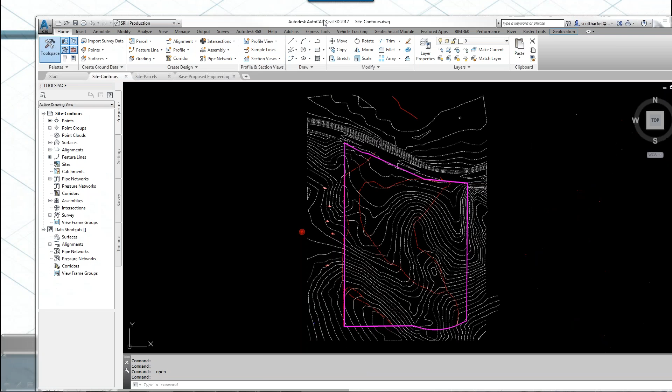Okay. I've already gone ahead and created a surface, and I've put in a polyline for the boundary of my project. For time's sake, hopefully we all know how to go ahead and create a surface and things of that nature. I've also gone ahead and laid out some parcels, right-of-ways, etc. And I also have my base proposed engineering drawing, what I actually want this project to look like.

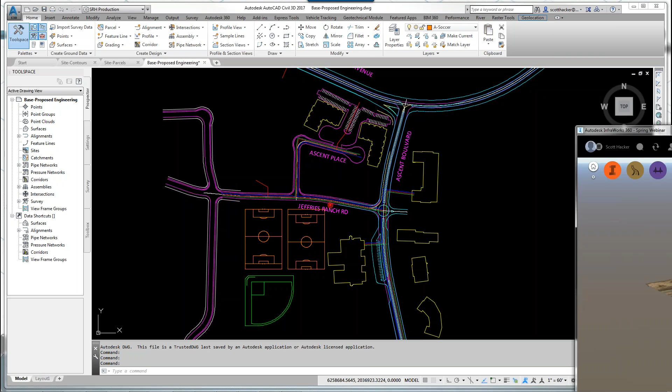There are a couple of different buildings. We've got roadways, and we also have some ball fields that we're going to try to bring in and hopefully show in InfraWorks, as well as bringing it back into Civil 3D. So with that, I'm also going to go ahead and bring InfraWorks over. Hopefully everybody has opened it up and is familiar with InfraWorks. And this is my project area.

Okay, this is in Oceanside, California. So it's kind of densely and sparsely vegetated here. We've got a main road running across the top of the project. We've got a development here. And what we're going to do is, like I showed you, we want to have a couple of office buildings and some athletic fields running through here. So we're going to have a couple of local roads, a collector road running through. And this is my master.

So if I come back and I go out to InfraWorks and I use the Model Builder, this is actually a pretty nice piece of software. It allows us to go ahead. We can search anywhere, not only in the United States, but the world. So if you are creating any type of projects anywhere else, say Mexico City, as you can see on the screen, Venezuela, etc., it doesn't matter. It now encompasses the entire world so that you can access it.

So in order to find your location, I'm simply going to type in Jeffries Ranch Road, and it automatically finds it for me. So there it is, Jeffries Ranch Road, Oceanside, California, US. So I'm going to click on that, and it's going to take me directly to the project location. Now this is accurate. I've already gone ahead and taken a look.

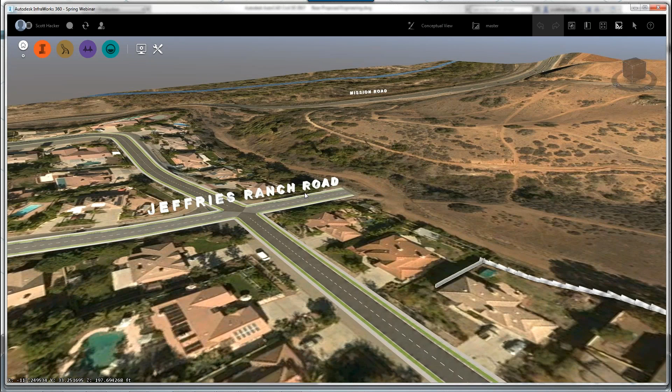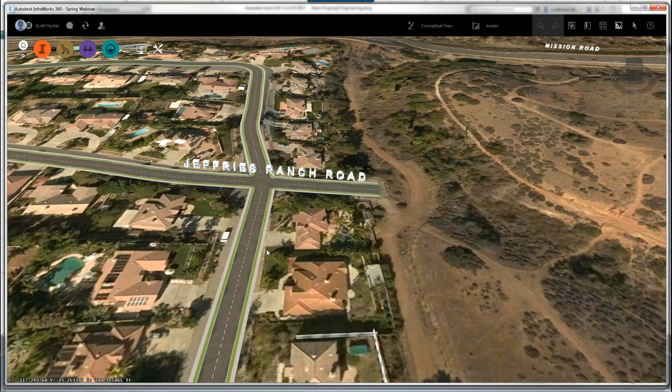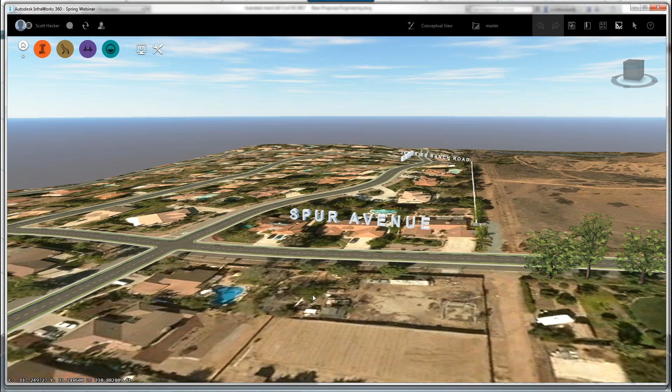Now I've added the roadway names here. So these are just 3D objects that I've brought in from SketchUp and created so that I can give my customer an idea of where exactly we're at in the project. So I've gone ahead and labeled most of the existing adjacent to our project. Okay, there's Spur Avenue, and we've got Mission Road all the way there at the top. Okay, so this is what you're going to get.

Now I told you you're also going to get some terrain, and if I turn this up on itself, we're going to go ahead and see that. Now this is a pretty large parcel here, and it's actually pretty ugly to try to develop, quite honestly. We've got a low spot here and another low spot here. Looks like drainage areas. So we're going to have to take a look at what's going on here. Okay. Now with that, you're going to get terrain.

But most generally, we're going to have a survey crew go out and shoot our topo. So we're going to have a more defined and hopefully a more accurate surface once we get into InfraWorks to bring in. So the first thing I want to do is I want to go ahead and bring in my existing surface, okay, and kind of update my terrain here if at all.

So what we're going to do is we're going to go to our data sources, and let me just come back here for just a second. You saw that I had my Civil 3D surface already squared up and taken care of. So in this case, I'm going to use the entire Civil 3D drawing file because I'm creating my project as data references, so I'm going to have a very small surface drawing, a very small parcel drawing, a very small alignment drawing, and then we're going to bring them together at the end for presentation.

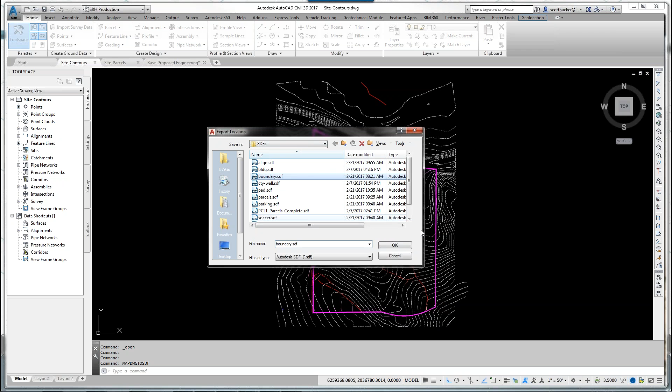Okay. Now with that, I am going to go back to Civil. And I want to bring in my boundary so I can get a better idea of how the extents of this project are going to look. So I'm going to create an SDF file. I'm going to use the MAPDWGTOSDF command. Now I've already created one for boundary, and I'm just going to end up canceling this.

But it opens up the export dialog box, and you're going to want to either select manually or you can select by layers. In this case, I would select manually and just zoom in and select my polyline. Enter takes us back. And in this case, you want to treat closed polylines as polygons because that's important. If it's open, it's just going to be line work. If it's closed, we can actually create areas. So with that, I've created it. We'll just cancel back out.

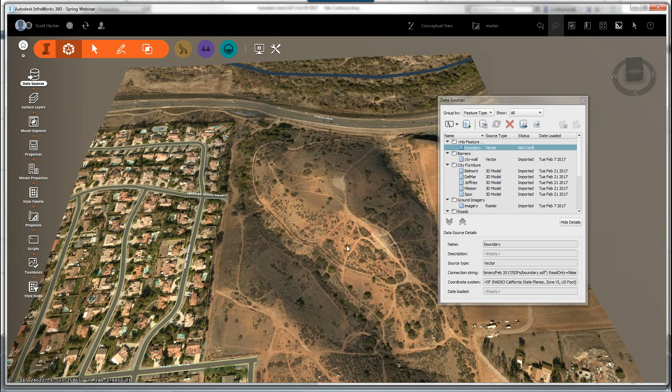Okay, and I'm going to go back to InfraWorks. And we're going to bring that in as a coverage area. So I simply select my feature type. We're going to go to our SDF files. And I'm going to bring in the boundary, and I'm going to open. Now I can drag and drop as well. For the purpose of the presentation, though, I'm just going to select it via Windows.

And it comes in. There it is, vector, but we've got to configure it. So we're going to select configure. And we've got to give it a type. In this case, I want it to be a coverage area, because with a coverage area, I can now give it a style.

Now, I do want to step back for one second. Please make sure that you have set your coordinate system in your Civil 3D drawing. In this case, it's California NAD 83, and it is survey feet, because we want these to go back and forth seamlessly, and they will if you set your project up correctly.

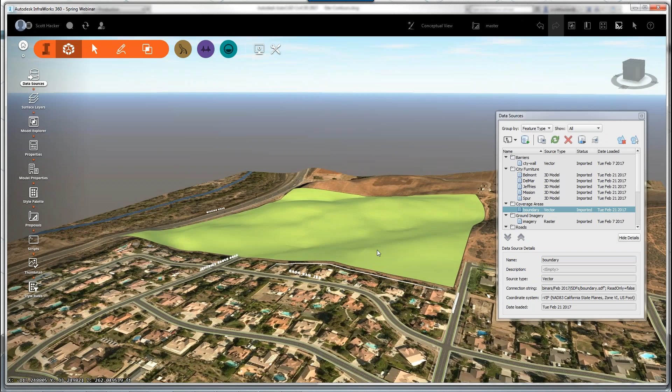So right now, it's going to bring in my boundary in the exact location that I have in my Civil drawing. So I need to come back to my common, and I'm going to give it a style because I want to see it. So I'm going to select grass with gravel border. We're going to select that, and simply say OK. We'll close and refresh. There's my project boundary. Now I've brought it in as grass, so you can see it drapes itself over my existing terrain. And we can get a better idea, hopefully, of what our project looks like.

Okay, now with that, let's say I'd like to see my contour lines. This is great, but I'd like to see my contour lines. Well, in order to do that, I need to create either a parcel or an easement within InfraWorks. So I'm going to go to my Design, Review, and Engineer location, and I want to create an easement. So I select my Draw and Design, and I want to create an easement.

Now, I can set up a style here, which is no problem. I can even set it so that it's transparent. So if I want to show my contours, I simply select with my cursor the area that I'd like to see. Double click at the end. Whoops.

Double click at the end, please. There we go. Okay, now let me move my data sources over to my other screen here real quickly. All right. What you need to do is you're going to see your asset card.

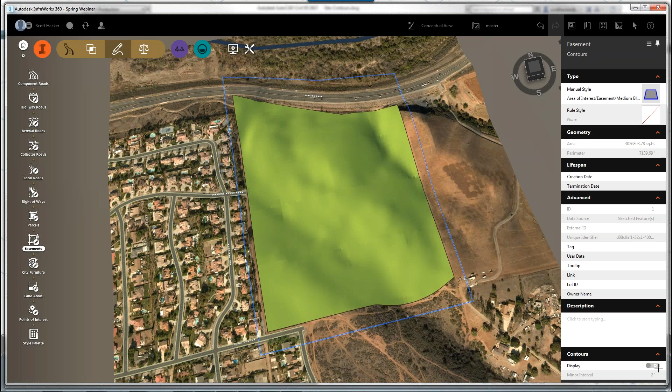Okay, so this is an easement. If you want to enter a name, you can. If you just want to simply call it something like contours, great. Okay, but down here at the very bottom, I want to show my contour, so I actually have a panel here so that I can do so. So if I simply move over and click toggle on, there's my contours.

Okay, now labeling them is a little bit more difficult. You can't label them in InfraWorks like you can in Civil. However, you can create an SDF file for your labels and you could bring them in accordingly. Now in this case, we're pretty tight and we've got some serious grade issues as we saw before.

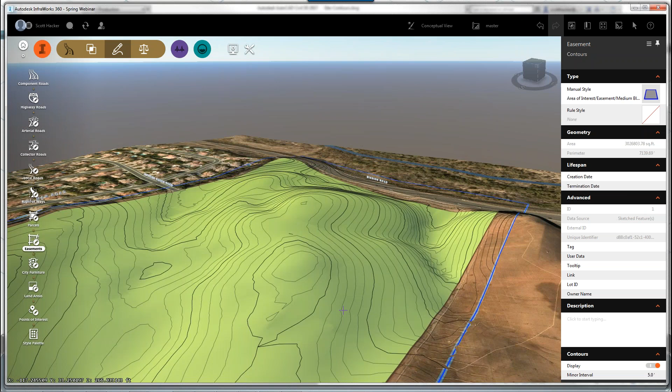But if I want to change the interval, say from 2 foot to 5 foot, I simply click and hit enter, and now I see my contours so I can get a better idea here, okay, of what's actually going on. All right, so with that, I've got my coverage area, I've brought in my existing surface, and I've actually given it some contours.

Now, what I like to do is I like to create different proposals within InfraWorks. So I basically just went ahead and created a new proposal. So if I say add here, it's going to prompt me for a name. And in this case, I called it surface. And it makes an exact copy of my master proposal. So if I come into surface, it's going to take just a second to regen.

Okay. And in this case, I've gone ahead, I've added my north arrow just in case. And then I would create my surface here. Okay, I did it on the master because that was the first one, but I should have done it on my surface. So with that, I'm going to go back to my master. Okay, and what I'd like to do now is very quickly go ahead and add my parcel lines.

Now, I've got parcels created in Civil. So I've already had my designers or my surveyors or whomever I choose to create my parcel layout. I've created Civil 3D parcels. So that's my pond. I've got some single family, some multifamily here. I've also got commercial right of way. I've got a school, and I've also got a municipal reserve. Okay, so it's going to be open space there.

So in this case, what I want to do, I do want to create an SDF file or a spatial data file, but I don't want to map DWG to SDF. I want to actually utilize the output tab, and export civil objects to SDF. Okay, now I'm going to go ahead and select the location, and I actually have parcels here, and I'm going to set save. Yes, I sure would like to replace it.

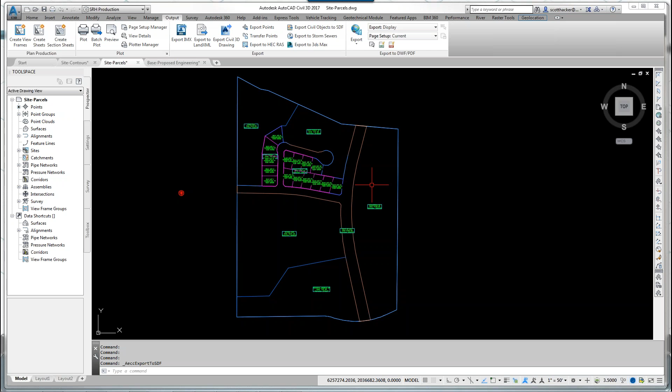Okay, so it's going to write it out as an SDF. It's going to show me my drawing coordinate system. Okay, and I'm going to click OK. Well, that's just grand. You're supposed to overwrite it, but let's do this. So we'll do parcels, and we'll say 01, okay, and okay, because I want to show you this.

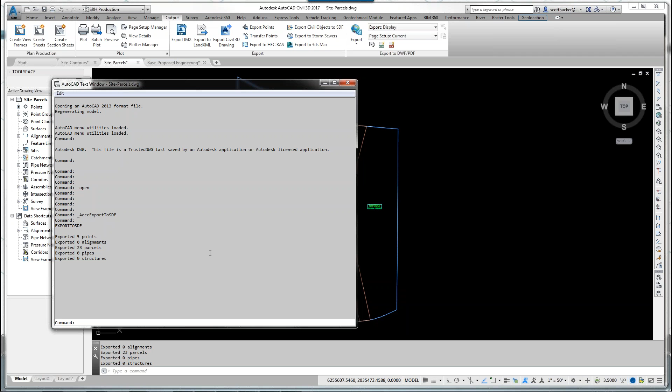I want you to come down here and look in my command line, exported 23 parcels. So it's going to show me exactly what it's exporting. There are no alignments in this drawing. There are 23 parcels, no pipes, no structures. Okay, so that's what has been exported. There are 5 points in there. Now those are just street lamps. They're not going to make any bit of difference at this juncture. Okay, so I now have an SDF file for my parcels.

So we're going to come back, and I'm going to go ahead and bring them in. So let's bring back our data sources here. Okay, so I did create an SDF, and I'm going to use my parcels from before, and we're simply going to say open. I don't want the points, I just want the parcels. We're going to say okay, and

under configuration, these are going to be coverage areas. Okay, so we've already created one for our overall boundary, but I want to create a coverage area based upon my parcels. Now the same situation applies here. It's going to find the coordinate system and translate it properly. I do want these to drape for the time being.

Okay, so I'm going to go out and I'm going to select a style. Okay, and I'm going to go ahead and select grass again. We'll say okay, and we'll close and we'll refresh.

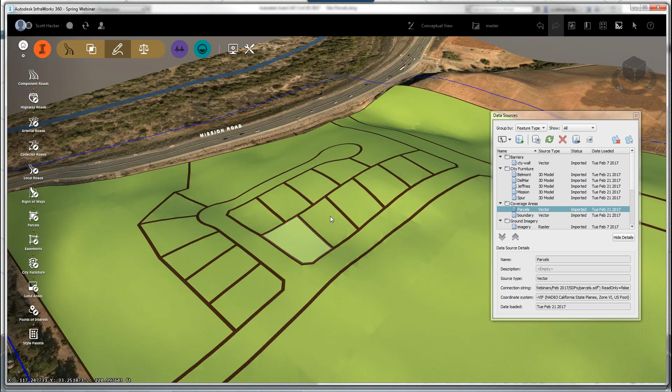So now we have our parcels, and we can get an idea of what's going on here as far as our grading. What do we have to look at? Okay, it's all about design and context. All right, so as you see, we're going to have a knuckle and a cul-de-sac. We're going to have a through road here, local road. We're going to have a collector, and eventually we'll tie into Spur Avenue somewhere here down on the south portion.

Okay, so with that, now what I can do is I can actually go ahead and use my style palette to create a zoning map. Okay, well that's great. So we're going to come back and we're going to access our build and manage, and under style palettes I'm going to go ahead and look for coverage areas, and I've created one called zoning. So what I've done is I've basically added with my style, I've created a new coverage area, and I've created them based upon a zoning map that I found online. So just bear with me, it may or may not be something that you're familiar with.

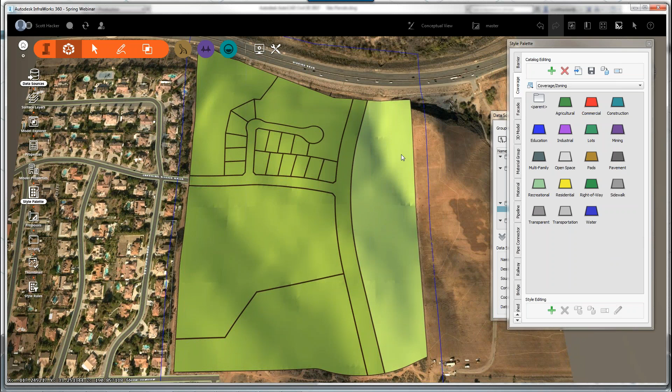Okay, but I've got my commercial here. So if I want to change this area here, I can simply grab and drag, and it's going to go ahead and update it so it shows up as my commercial area. Okay, we said that this was open space. Same situation. I've got right-of-ways. Simply drag it over. It's going to show it to us. Right? Multifamily. I've got educational or school is here.

I've got water that's going to go up here. My pond is up here. It's the low spot of the site. Okay. And then I've got residential, so I can pop these in. Okay. So we can go ahead and take care of that. And you guys and gals get the general idea here. Okay. Now again, if you need to, you can simply select show your contours, so you can create a pretty nice little zoning map that you can show people.

They can understand. The client sees exactly what's going on in the areas that you're going to utilize for your zoning. You can take this, print it off, bring it up on your computer screen, show residents exactly what's going to happen, let them know, throw on a legend, and they're going to be able to see exactly what's going on. So visually, this is exactly what we want. We want to be able to show our customer or our municipality what we're doing in real time and what it's going to look like.

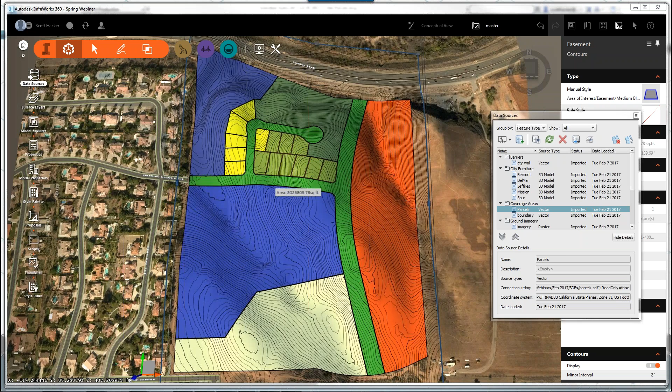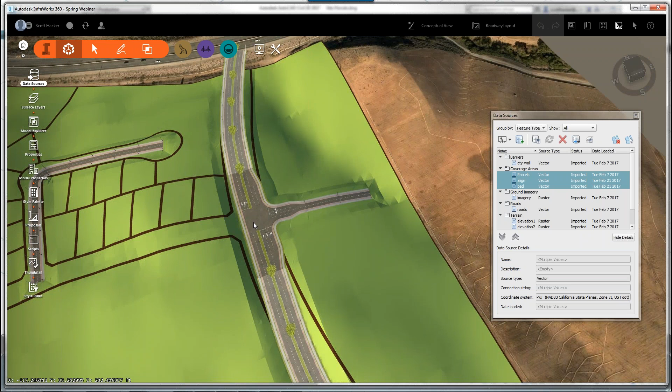Okay, now I've already gone ahead and I've actually created a roadway layout here. So this is what we're going to be able to accomplish within InfraWorks. Now what I've done is I've already gone ahead and I've thrown in this design road, I've gone ahead and thrown in my example here. So I've got a local road here to the left, and then I've placed a collector road in here. Now these are design roads using the design and manage tools that come with InfraWorks.

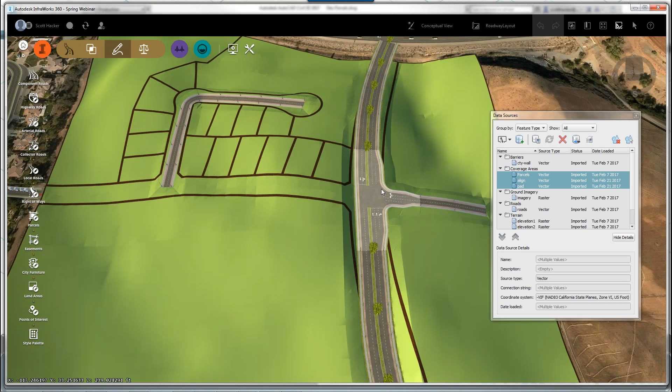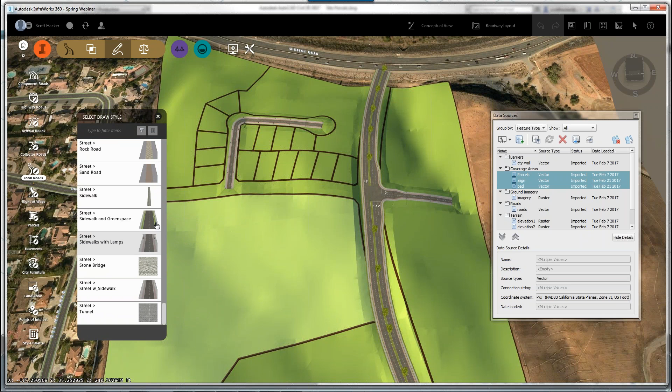So what I'd like to do now is I'd like to go ahead and bring in a connection for Jeffries Ranch Road. Okay, so with that, we're going to say that this is probably a local road, so we're going to select local, and we can select whatever style we would like. So I'm going to select, we'll just go sidewalk and green space for the time being. Okay, so all I need to do is go ahead and click where I want to start, and I'm just going to go ahead inside my right-of-way, and we're going to drop it somewhere there, and hopefully it'll connect up.

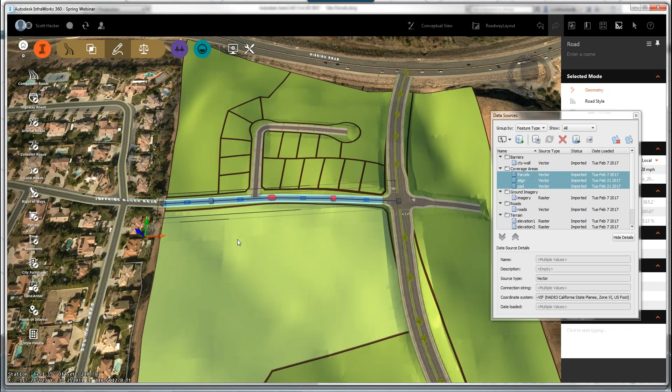Okay. Now what it does is it places our vertical curves based upon a 28 mile per hour design speed. All right. So you can see that Jeffries Ranch Road, and we can enter a name here. Okay. Has a design speed of 28. So if we'd like to change that to an actual 30, we can do that. It will automatically adjust our vertical curves, etc.

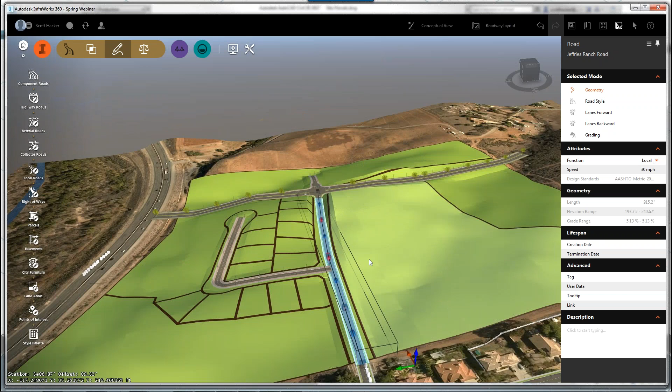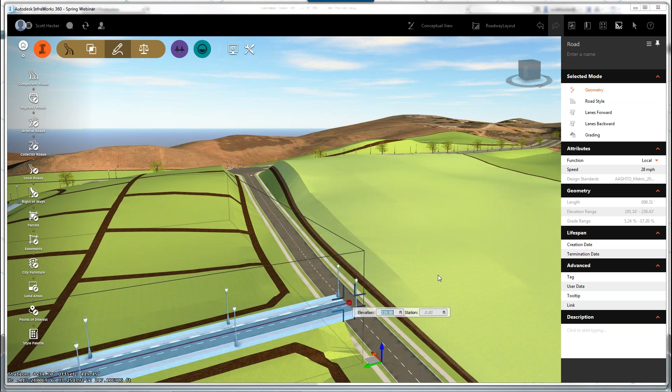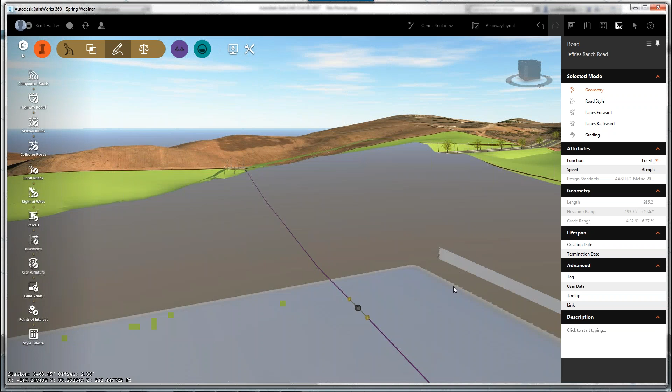Okay. Now we've got somewhat of an issue here because we don't have an intersection. So we've got a tight spot. So we need to either bring our collector road up or down depending on what's going on here. We'll move it up just a hair and we'll see if we can connect and come back and actually get our tie-in. And I may need to just go ahead and add a PVI and move that up until I get my intersection.

It's a lot easier than I'm making it here, folks, so bear with me. So I'm a little bit high. And I'm not quite there.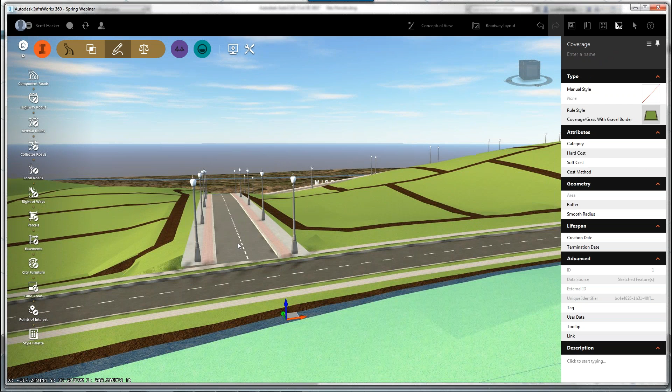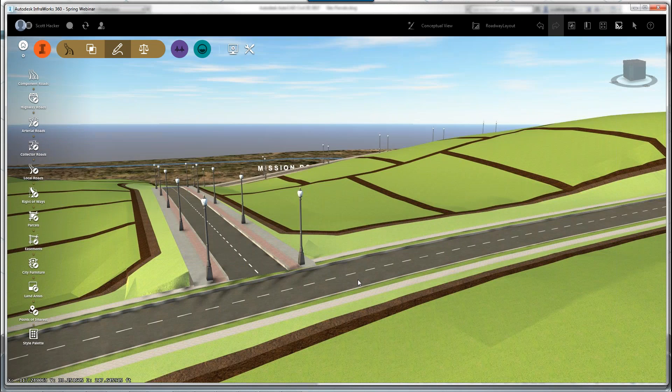Okay, and of course it's not doing what I would like it to do. Never fails. It's supposed to be able to move it this direction, but it's not going to allow me, and that's okay. We can come back and fix that later. The important thing here is that we actually got it to tie to this intersection.

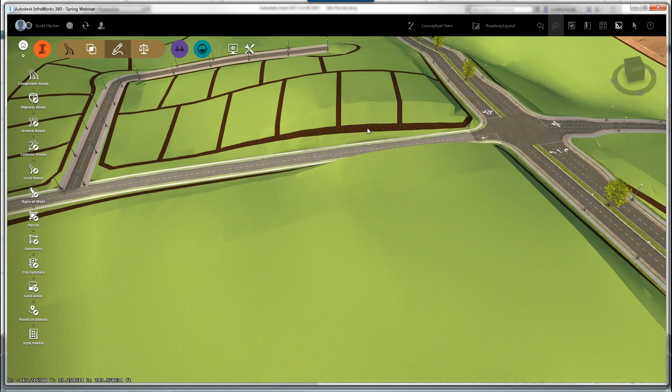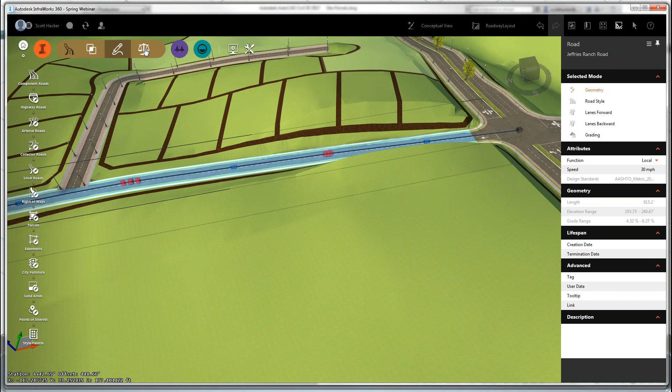Now what I'd like to do is take a look at my design road, because we had some serious relief here and it looks like I'm going to have some cut and fills. So what I want to do at least initially is follow existing ground. I'm going to select my design road, hit review and modify, and see what this road looks like in profile view.

Okay, so it automatically brings up my profile view. It shows where I'm tying in, so it looks like what I need is to add a vertical curve here. So I'm going to add a PVI and go ahead and drop it, so I can at least match existing.

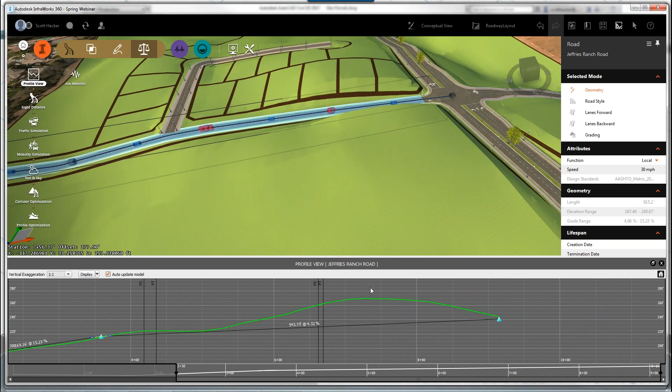And it's going to dynamically update my design road. Now in this case, I'm following along, and I don't know that I want to actually come up and over and hit my intersection here, because it looks like I've got a pretty good situation. But what I may want to do is add a vertical curve and just minimize my cut in this area. So we'll bring it up just a tad bit and minimize our cut.

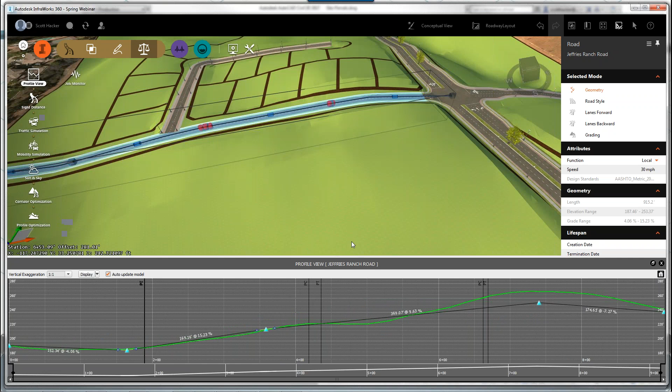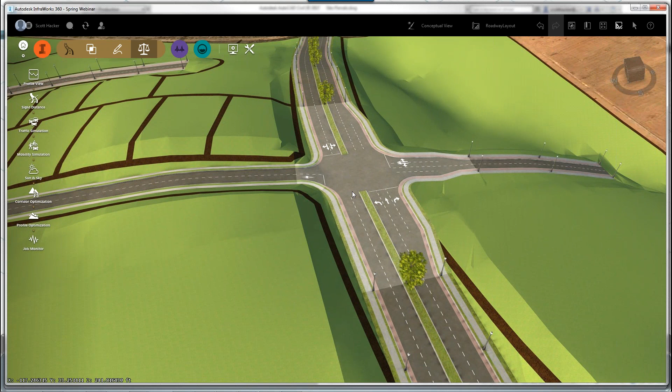Okay, so we can see that we're following along pretty well. And once we've got that taken care of, we'll close our profile view. It's tied in pretty nicely to our intersection. It's gone ahead and automatically created it, because we've actually got it right in this location. Okay, and I want to go ahead and see whether or not a roundabout might work.

So I'm going to select my intersection. In this case, I can see my design card. I've got a junction type of intersection. If I select the icon, I can change to a roundabout, so we're going to get an idea of what a roundabout's going to look like. Now I've got different types of roundabouts to choose from.

Okay, so I've got an urban, a rural, and a mini roundabout. Let's take a look at that and see what that looks like. Okay, so there's our mini. That might be a better idea than what we're looking at. But again, you can see it in real time and you can make your assumptions right here and right now.

So I'm going to go ahead and say urban double lane roundabout. Okay, and it's going to update it and show it to me. Okay, that looks about like what I'd like. So if I was going to put a roundabout in here, that's how I would do it.

I am going to come back though, and I'm going to change back to my intersection. Now it's going to make some adjustments back. Perfect. Because what I'd like to do at this point is go ahead and add some widening.

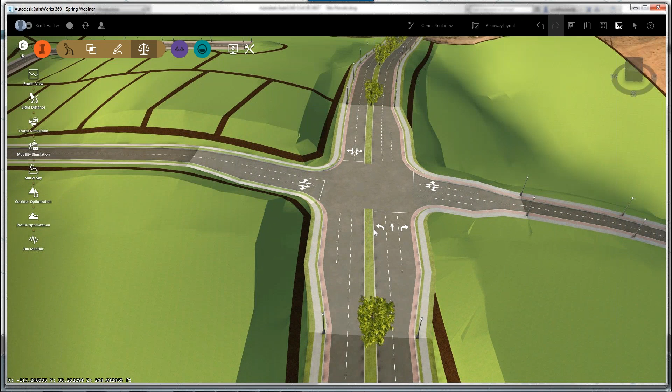So we're going to go ahead and add a couple. Okay, it's going to change up the striping. It's going to change my street the way that it looks. It's going to automatically adjust it and bring it back in. Okay, now we could go ahead and take this off, make the adjustment in profile view.

But again, we're just bringing this in conceptually, but I can go ahead if I choose to do so and make my design changes here. Okay, this is actually pretty ugly.

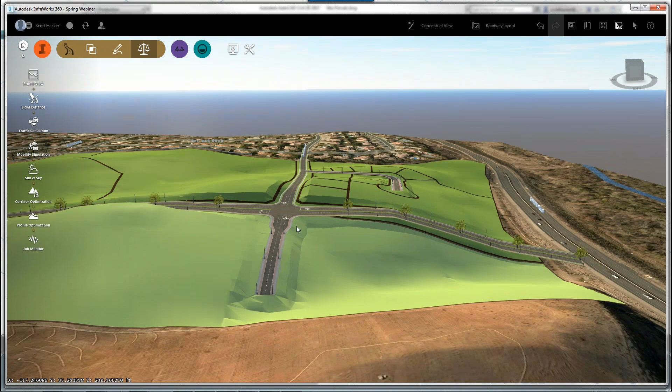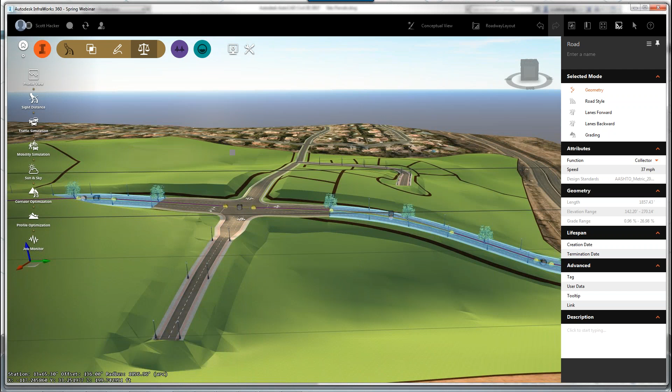So in this case, maybe I want to spread out my vertical curve, see if that makes any change. I might want to go ahead and drop it a little bit. Okay, but I want to smooth it out. Not too bad, I suppose. We could do worse.

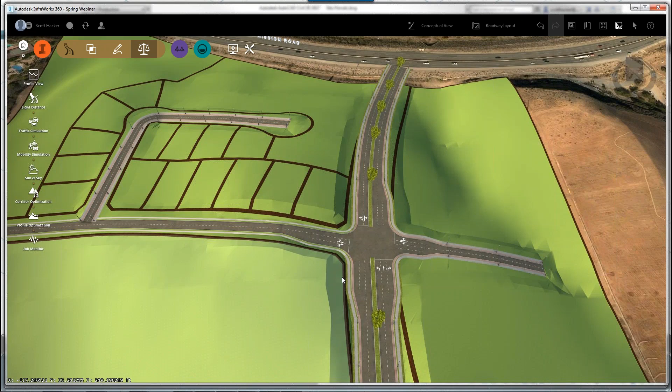Okay, so what I've got here now is I've got my design road, I've got my parcels, and what I'd like to do now is go ahead and bring in maybe some parking. So we've got our multifamily up here, and I can bring in some pads and some parking striping that I've created. Now I've done that in Civil because it's still a lot easier to create in Civil, since we're just using some simple AutoCAD. Create it with vehicle tracking if you have it, because that will make your life a lot simpler. But we've got two multifamily buildings here, we've got some parking, and we've also gone ahead and got some striping.

Okay, so with that, we're going to go ahead and use the SDF file. So we're going to go ahead and create one. We're going to map DWG to SDF. I've already created one here, and that's the one we're going to use. I've also gone ahead and created one, I believe, for striping. I have. There it is.

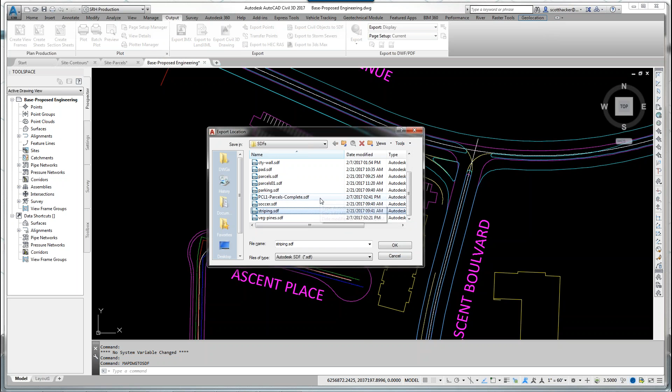Okay, so we'll jump back to InfraWorks, and we'll bring this in. Okay, and I think in this case, I'm going to go ahead and try to create a different coverage area based upon my huge slope here. I don't really want to go ahead and deal with that as far as grading it, so to speak. So what I can do is bring in a coverage area, but maybe what I'd like to do first is start to make this a little bit tidier, so to speak.

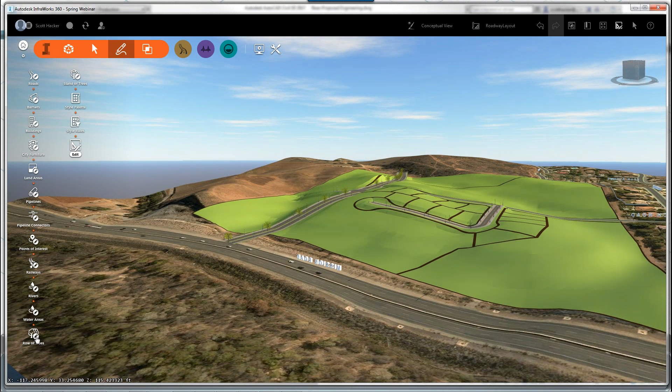And I'm going to go ahead and bring in some trees. So I'll bring in a row of trees, and I can select which ones I'd like. We're in California, so we'll go ahead and put in some nice palms. There's a South Carolina palm in here somewhere, and we won't worry about that. We'll just use this one.

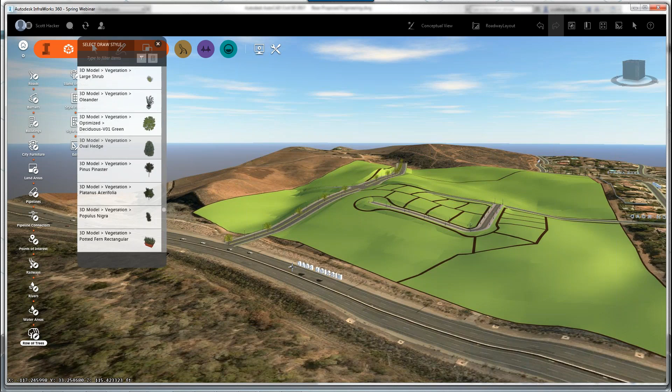Or maybe we just want some hedges. So we can go ahead and drop these in. I'm just going to draw a row, so we have some sort of a buffer. Okay, now it's going to space them kind of weirdly. So if I hit escape one time, I've got my slider bar here so I can change the density.

Okay, so you can see it's going to add more. Now, what I need to do here is because I have a row, I can simply click twice on one of the objects and increase my density some more, so I can actually go ahead and fill it in. Now I also want to change the size. I want these pretty large. Okay, so I can go ahead and start to create a buffer here.

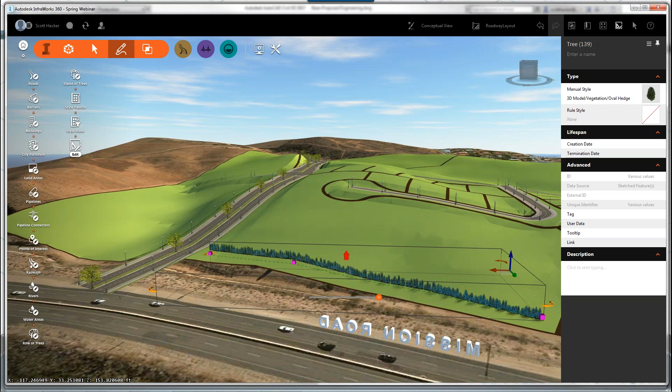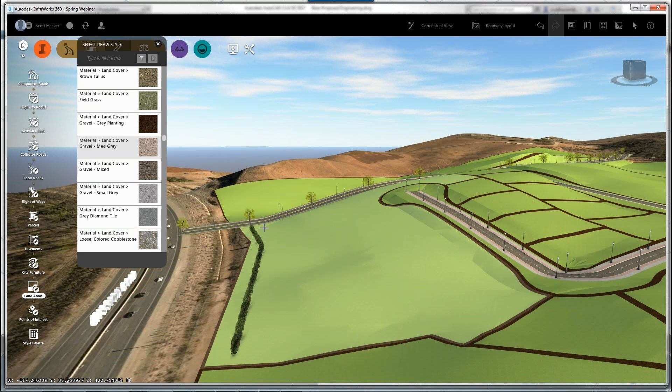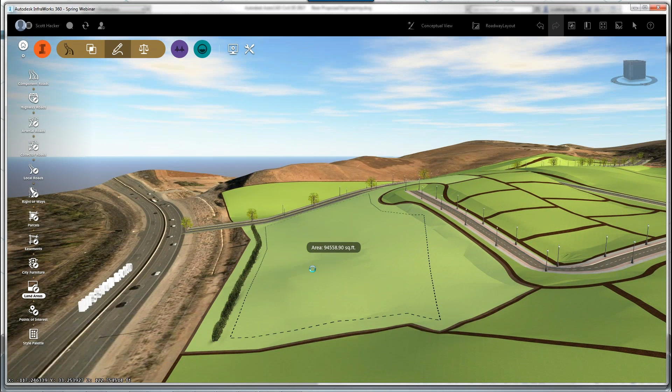Okay, great, no problem. All right, so we're going to come back. We're going to create a land area, and let's just make it gravel med grey. So we'll just start here, down, we'll just kind of eyeball this, so to speak. Okay, it's going to throw in my coverage area, at least it should have.

Let's change this, see if it's going to show up for us. There we go. Okay, so I can go ahead and raise it up. I see how it's dropped off here, but I can go ahead and make my changes. So if I want to, I can bring it up individually using my gizmos.

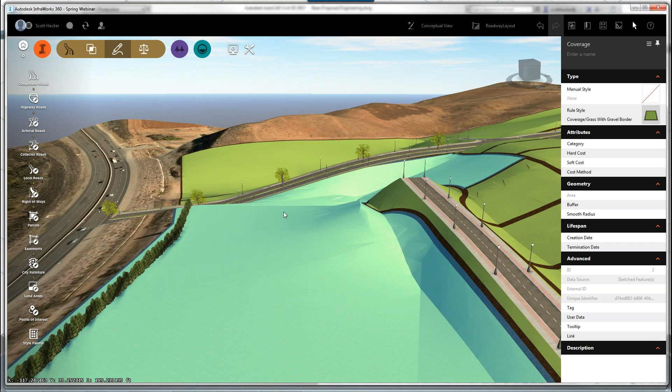Okay, and your InfraWorks is going to automatically adjust. You're going to start to see it improve the layout, so to speak. So if you want at least a general sloping away from our surface, we can do that. Okay, I'm just going to go ahead, we're going to get rid of it and take it off, if I can here. And if I can't, that's not a problem. We can always Control Z and jump back.

Okay, so if you see something you don't like and want to get rid of it, you can simply hit Control Z and it's going to take it out for you. All right, so we'll just go ahead and deal with that.

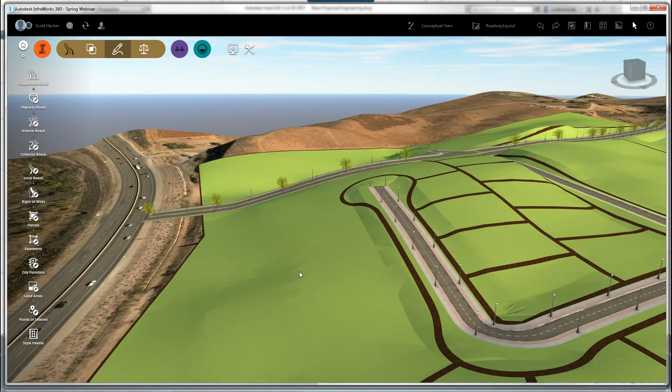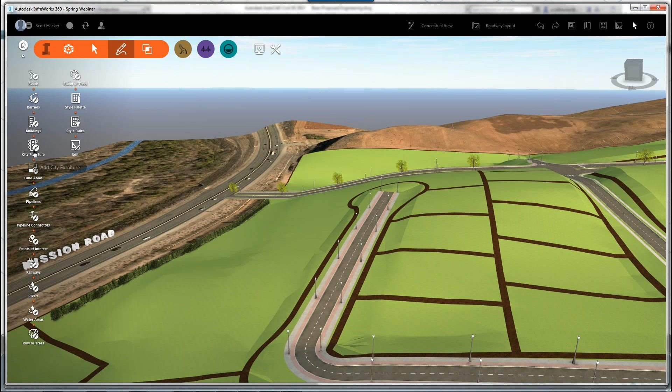So we'll go ahead and throw in maybe a couple of buildings here. Just come back to city furniture, and again we can see the different types of buildings we have and the facades we can create. I'm going to select city furniture, and I've got a post office, a couple of post offices, a church, and a couple of buildings I can utilize. Residential, we'll just throw one in. This is multifamily, we'll just say that's what's going to be here. So we'll drop that.

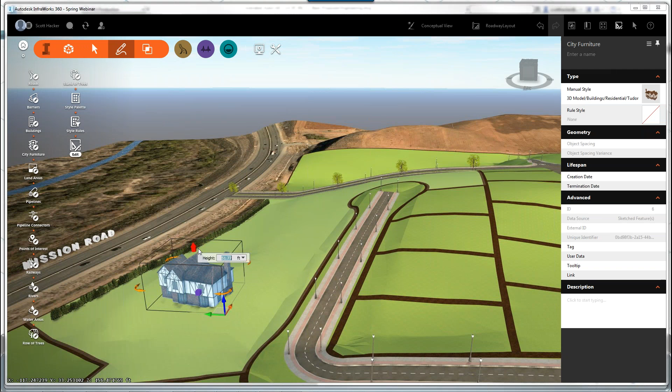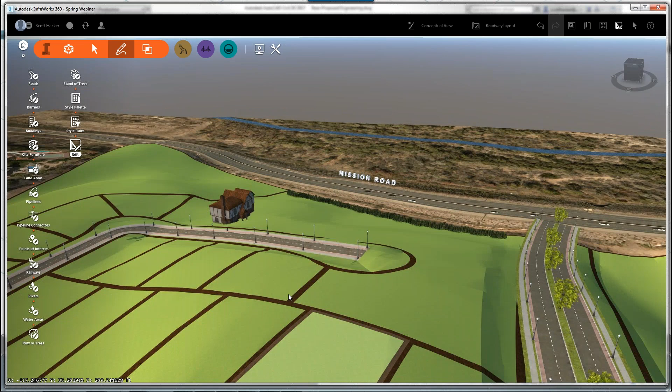Okay, and we can go ahead and place it, rotate it, etc. We can change the height. So if we have a different location, we can drop these in as well. We can start to make this look a little bit like what we want. So we can go ahead and select, and if we hit Control D, it allows us to make a copy, and we can place this wherever we would like. We'll drop that in right there.

Okay, looks good to me. Now let's go ahead and take a look at our parking. So we're going to come back to our data sources.

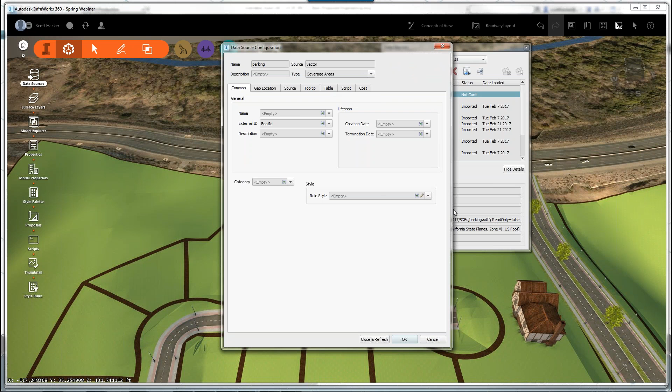I'm going to bring in the SDF file I created for parking. We're going to configure that. Okay, it is a coverage area. And I'm actually going to give it a material for a roadway, drop it down and say surface light. We're going to close and refresh.

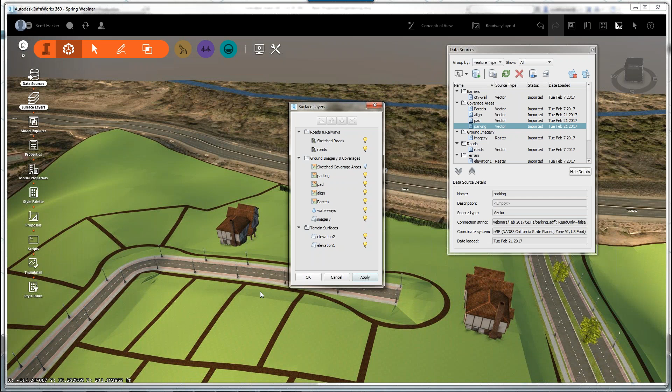Okay, and what we'll do is this: we'll come over to our surface layers because we can adjust - we do have layers in InfraWorks. My sketched coverage area, I'm actually going to freeze for the time being and say OK. And in this case, I've already brought in the buildings, but we'll get rid of these. But you can see here's my parking area, and I've got it set up so that it is concrete. Now there's that nasty slope, but we can take care of that.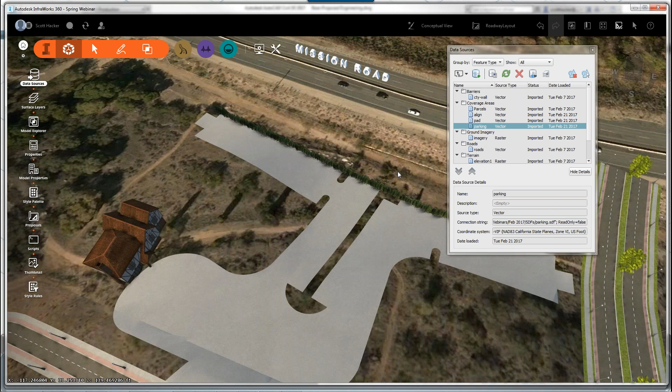And what I also want to do now is bring in my striping. With that, I'm going to access it, and I'm just going to bring it in and drag and drop. Okay, it's automatically going to go to my data source configuration file. I'm going to call this a coverage area as well. Now for my rule style, I'm just going to give it some color, so we're going to make it white. Okay, so my stripes will be white.

Now when I'm bringing in line work, InfraWorks doesn't understand lines, so I have to give it some width - I have to give it a buffer. So if I go to my table and give it a 0.167, if this is a 3-inch or 4-inch wide stripe, I just divide the width of my stripe and put that in as the buffer. So it's going to place width on each side of it of 0.167. And if I close and refresh, we'll go ahead and get rid of this. Drop that over - we can see our parking area.

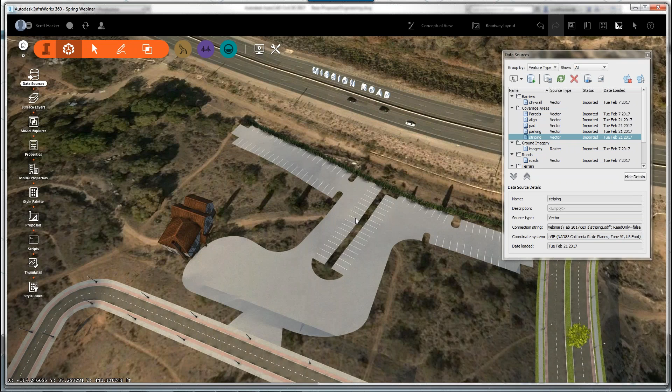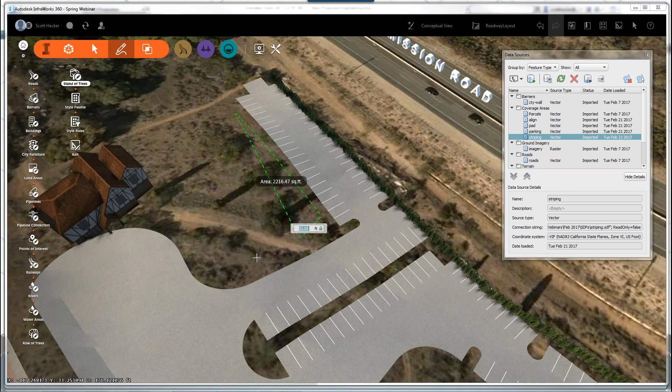Now once we get to this point, we can go ahead and add areas of trees. So if we want to do a stand of trees here, we can do that. We'll go ahead and put in some deciduous - maybe we want to bring an area of trees here. Again, we want buffer. Okay, we'll hit escape, we'll give it a little bit more density - they're bringing them in random height. So we'll go ahead and drag those up so you can see.

We've got furniture, so we can bring in cars, we can bring in vehicles. Let's go ahead and bring in an ambulance - somebody had a heart attack, they saw the steepness of the hill. Just simply drop that in.

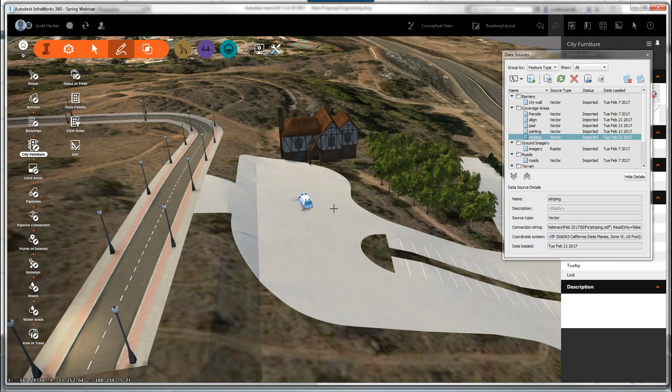Okay, and now we can start to make this a little bit more realistic here. So you can bring in all sorts of things from city furniture - we've got fire hydrants, points of interest, you can bring in trains, you can bring in people. So if you want people walking in, you can make this as realistic as you need to in order to get your point across.

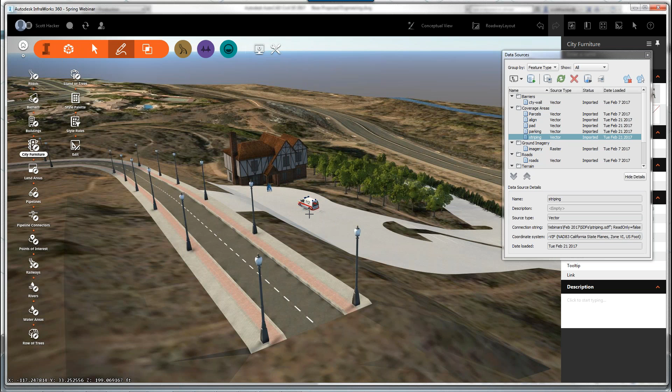Okay, and again these people are adjustable - turn them around, they're going to be walking this direction, we can move them closer to the door, etc. You can also create, instead of a stand of trees and actually using trees, you can go ahead and create using people. So we'll go ahead and just select a woman here.

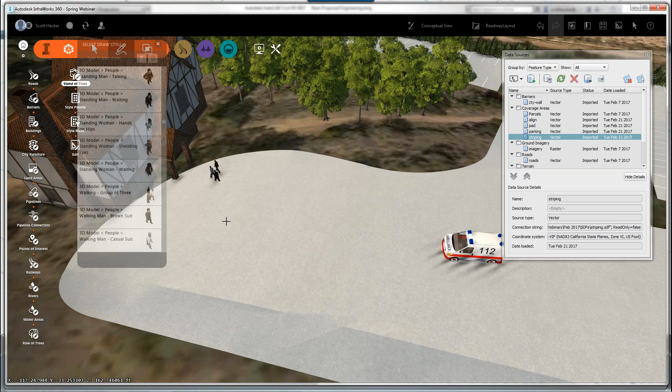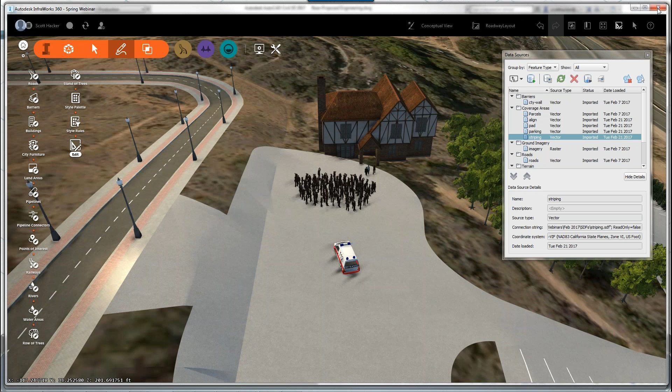So if you need to populate an area, okay, you can go ahead, increase your density, and we've got a crowd, just like that. Okay. So with that, now we can also go back to Civil 3D. Okay. We're happy with what we have here. I'm going to go ahead and I'm going to close InfraWorks.

Because what I'm going to do now is I'm actually going to try to bring in, okay, my design road here. So what I want to do is I want to insert my model from InfraWorks. I cannot insert it while InfraWorks is open. Okay, so I need to go out and take a look at it, find it, and it should be under webinars.

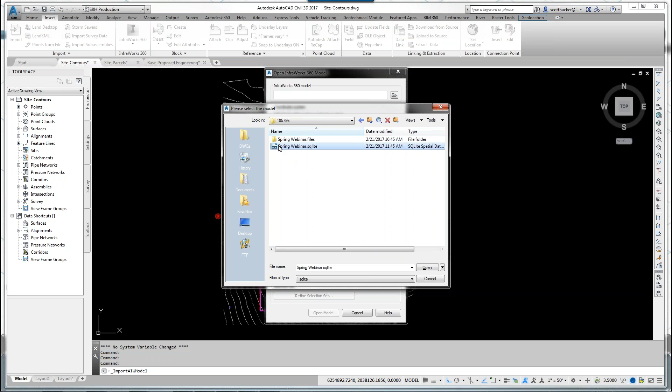Actually, you know what? I think it's, well, it's not there. It's under my documents. InfraWorks models, 360. Let's go by date modified. There we go. And I want to bring in the SQLite file. We'll say open. It's going to go ahead and take a look. It's going to find it.

Hopefully it's going to do our coordinate system. And it may take a minute or two. There it is. Okay, it's automatically going to transform it. What objects do I want to bring in? In this case, it says all objects. I can take a look. It can bring in design objects, so we'll do that. We'll say open model.

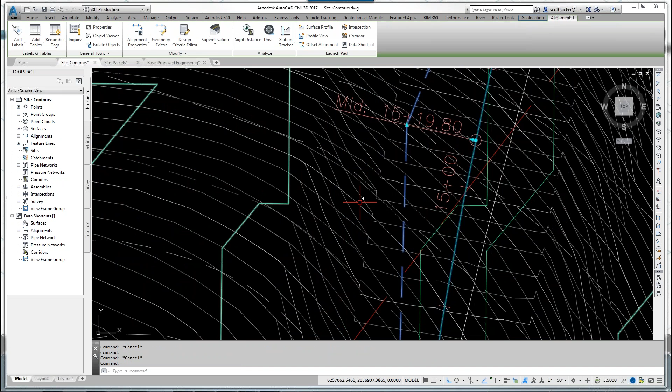And it's got to go ahead and read my InfraWorks, my SQLite. And I don't have any surfaces. It's going to bring in my entities, as you can see. Okay. And it's going to go ahead and bring in the surface. Okay. It's going to go ahead and bring in an alignment for me. So this is kind of ugly. So what I would do is I'd create a composite surface with my new roadway surface here, right, as you can see. So I've already got that taken care of.

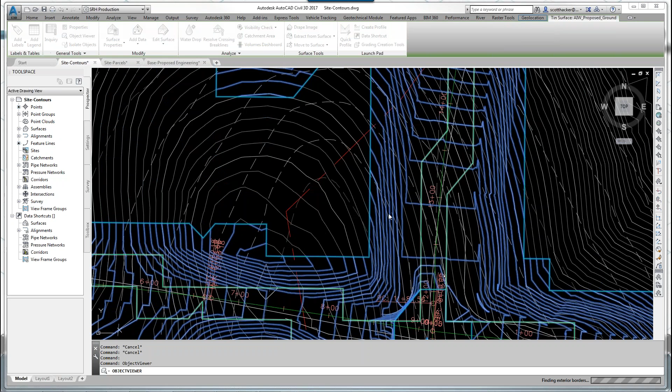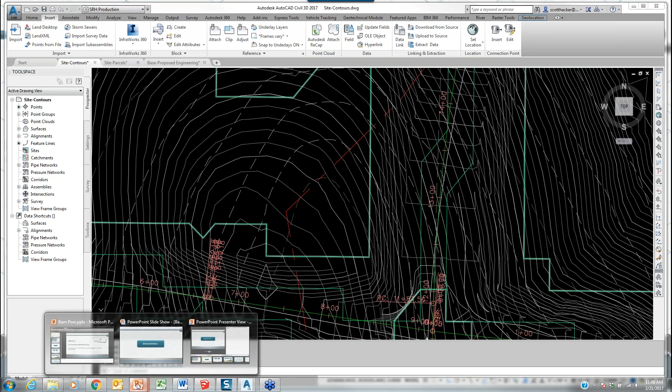No problem. So we'll go ahead and we'll select the surface. We'll right click. We'll go into Object Viewer. And we can take a look. Now I've got a hole in here. Not really understanding why, everything looked good in InfraWorks. But we can see exactly what's going on in context. Okay. So with that, we'll close that off. We are getting to the end of our time. Okay.